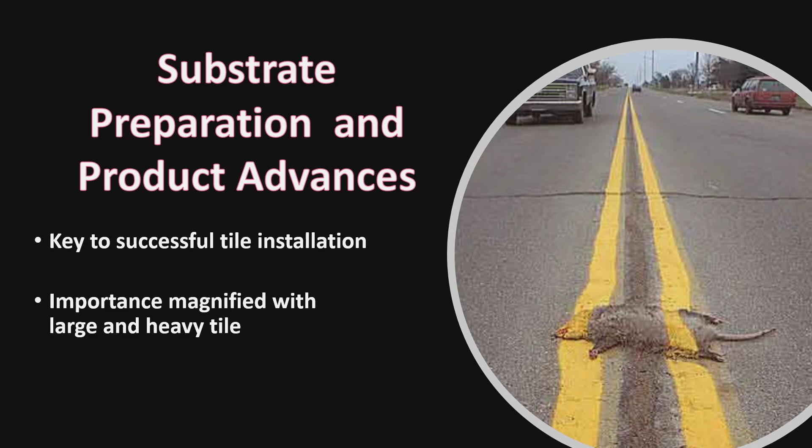To begin with, to me, substrate preparation is key. If the preparation isn't done properly, the rest of the installation is challenged, especially when you're looking at large format tile and tile panels. Contractors will tell you that it's best to address the preparation to begin with to make the installation much smoother and more efficient. Let's look at substrate preparation and some of the challenges that have happened recently over the years.

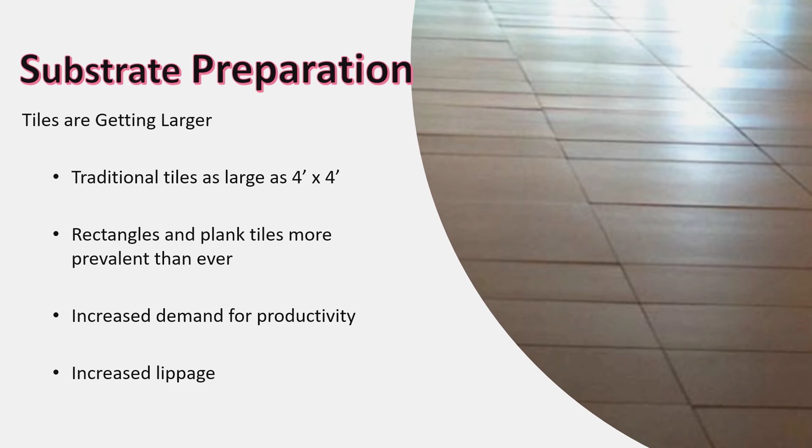Tile continue to get larger and larger. You can have tile that are 4 foot by 4 foot in size. Other trends that are challenging from an installation perspective are plank tile or rectangle tile, and there's also more issues with lippage in those type of installations than in smaller tile. And again, in today's world, there's an increased demand upon productivity and shorter time frames in reference to the actual preparation and installation.

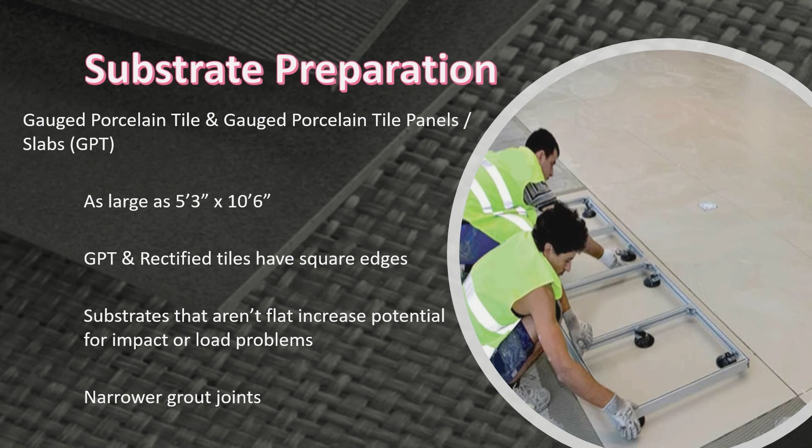The other scenario that turns into a challenge are gauged tile or porcelain tile panels. Some of them are as much as 5 feet 3 inches wide by as much as 10 feet 6 inches long. So the tile panels are a challenging installation scenario.

The other side that makes it difficult is that many of the tile are rectified or they've got square edges. The substrates need to be much flatter when you're looking at a large panel, because you need the coverage behind them to have the support so that you don't have issues with cracking, chipping, or spalling later. And to complicate it, the grout joints are getting narrower.

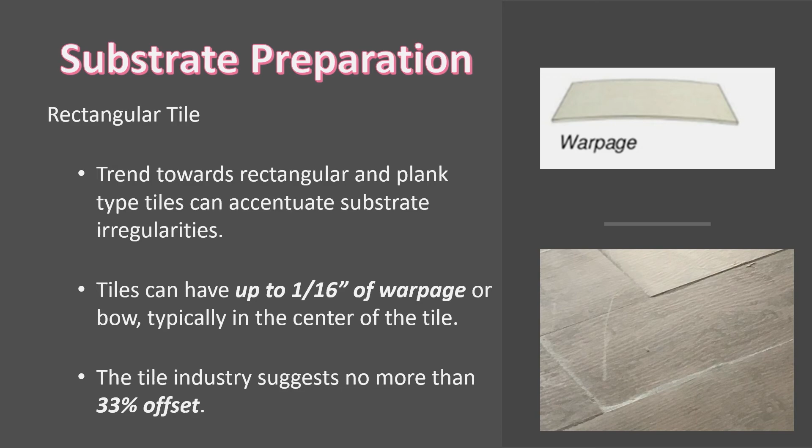One of the challenges with rectangular tile is warpage. Warpage in reference to a tile has a specification and a standard set for it, so we know it exists, but it's an installation challenge on the job site because if you don't do it in an offset pattern, it magnifies the scenario and becomes a challenge later for the installation when it's finished.

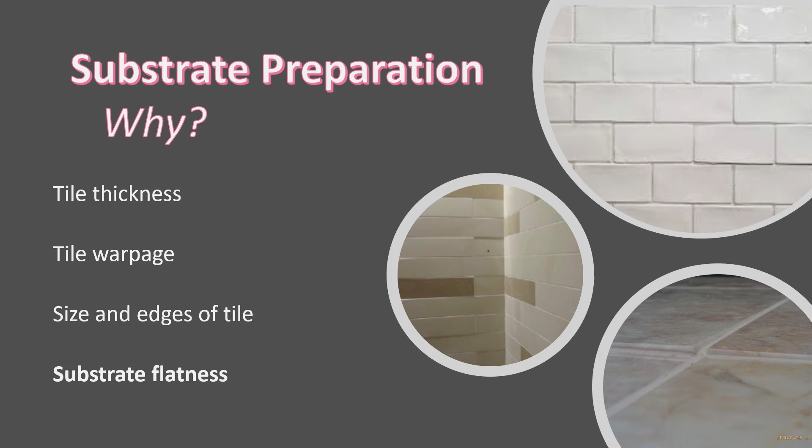What are some of the other problems you have from a tile side? You're looking at various tile thicknesses being a challenge in reference to installing and avoiding lippage. We talked about warpage, and then there's substrate flatness. If you don't have the substrate flat to begin with, later you run into challenges that are magnified when the installation is complete.

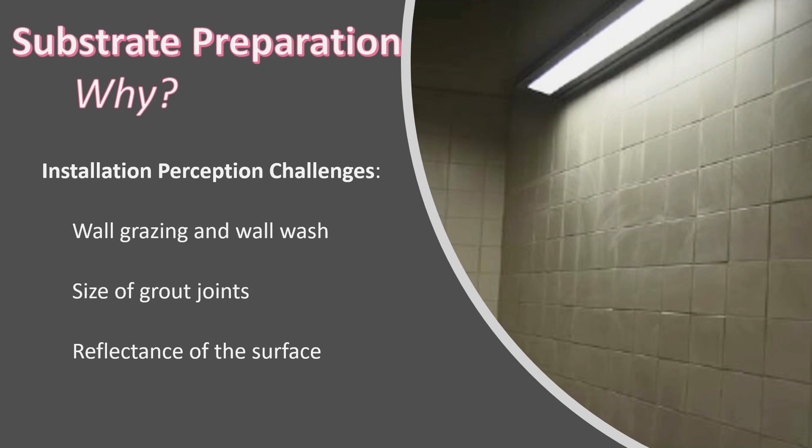One of the common problems noticed later is that many times when you're doing the installation, lighting is very poor, if at all, and it's a scenario that's very popular in bathrooms where you have the lighting shining down on the tile installation afterwards. Thus it causes the appearance you're seeing here, where you've got the wall wash look or the wall grazing challenge. So that's always one to take into consideration and plan for.

The other is the reflectance of the surface, which is going to magnify any problem that you're going to encounter.

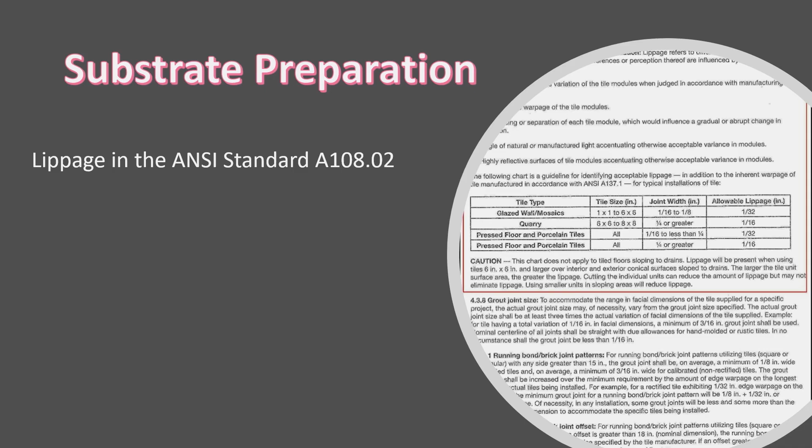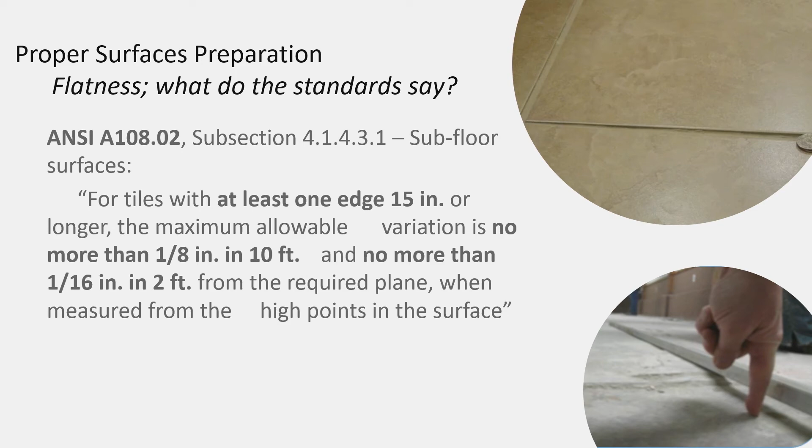The next is the ANSI standard, which also has a standard related to acceptable lippage for tile installation. If we look at the detail in particular in reference to the ANSI standard, it details out that for the tile, they must have one edge at least 15 inches or longer, no more than 1/8 inch in 10 feet. If you're looking at it from a perspective of a 2-foot area, no more than 1/16 of an inch variance.

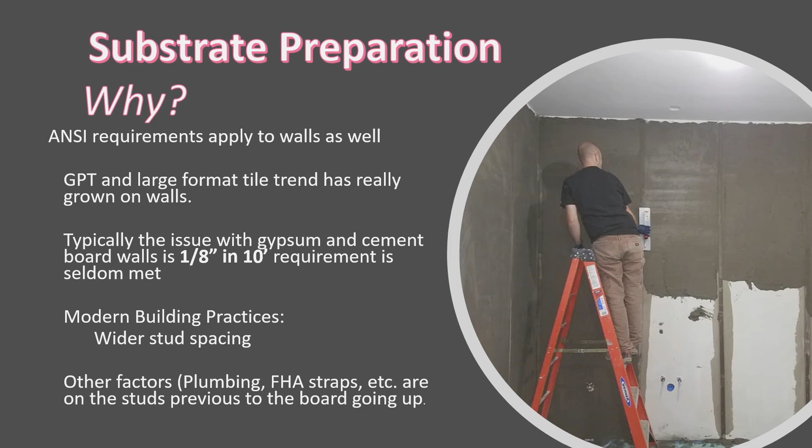Wall applications - ANSI also applies to wall applications, and it's a common problem in the industry related to drywall being out of skew, or cement board. This is a common problem that needs to be addressed with surface preparation, and cannot be addressed with the actual tile setting material itself.

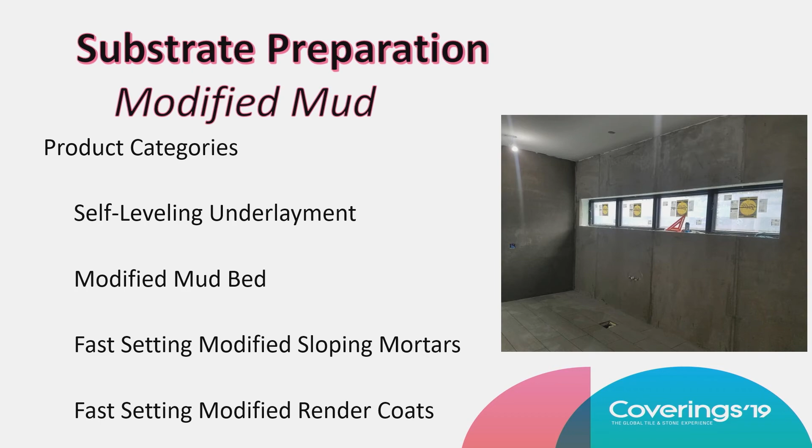Looking quickly at the products designed nowadays to address these issues, we have a category of 4 different types of products: self-leveling underlayments, modified mud beds, fast setting modified sloping mortars, and fast setting render coat type products. This is the technology that has changed over the last 5 or 10 years to address installation problems associated with large format tile, especially gauged porcelain tile panels.

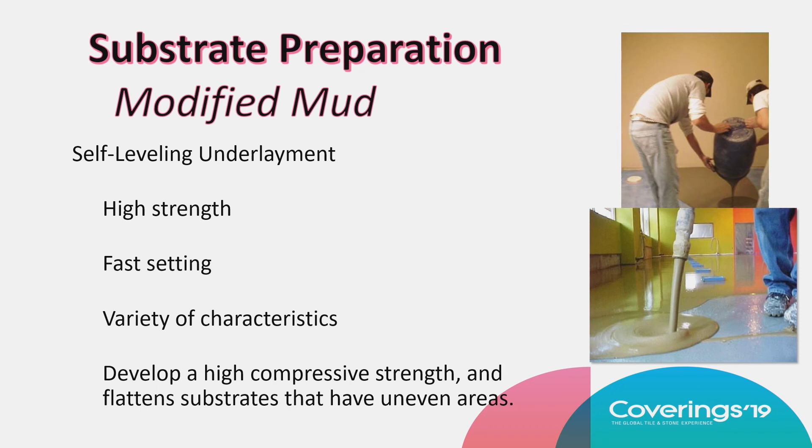Looking at self-leveling underlayments, many of them are high strength, and there's a variety of different types of products - fast setting products, slower setting products, products that range from 1/2 inch up to 3 inches. So the perspective would be to align and select the product associated with the timing of the installation and the demands of the installation you're looking to achieve, as far as flatness in the end surface prep.

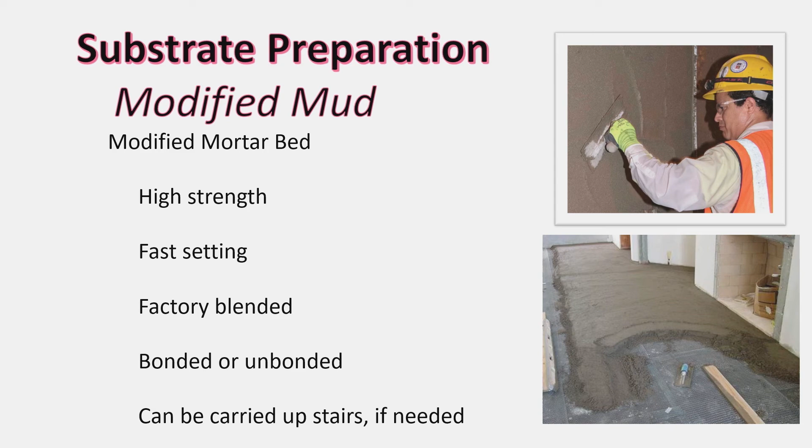There are also modified mud bed products that can be used as a bonded or unbonded installation method. There are fast setting products and slower setting products. But what the manufacturers provide are factory blended versions, as opposed to traditional sand and cement mixed on the job site. These products are manufactured and ready to use, and they come polymer modified or non-modified depending on your selection and need in that particular application.

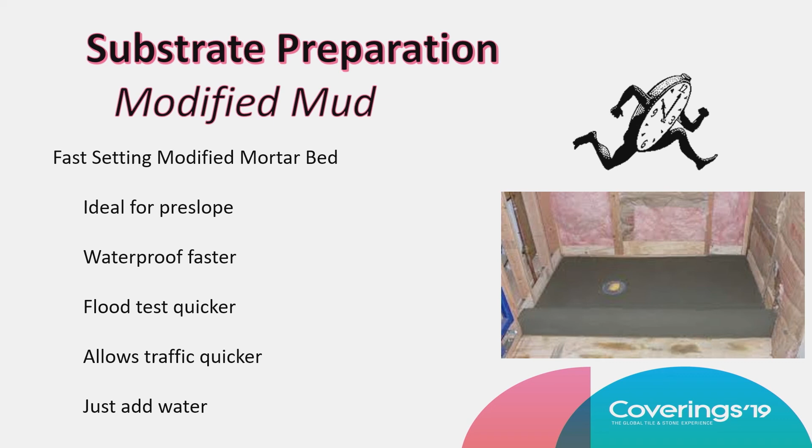There's also fast setting modified sloping mortar beds, which have come into the marketplace in the last couple of years because the push is to reduce the amount of time taken in that installation and turn it over to setting tile and waterproofing quicker. These products can set in as little as 1 or 2 hours, and then can be waterproofed an hour after that. It's really designed for the efficiency and turnaround of the job site, to get to the tile and finish the installation quicker.

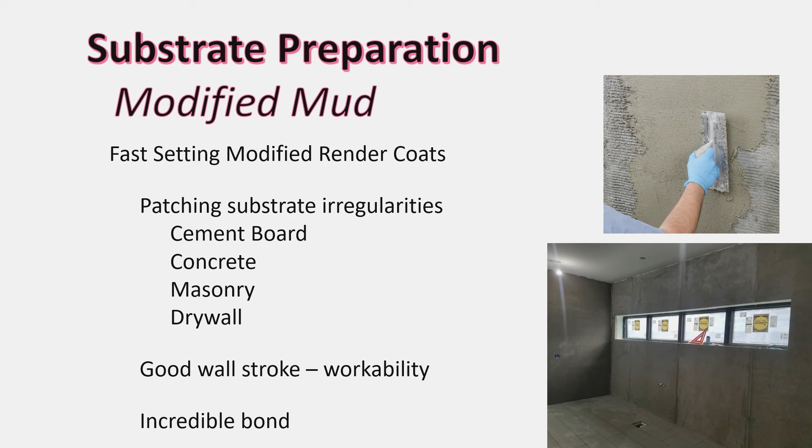There's also fast setting modified render coats that are designed for applications primarily on the wall - like the typical scratch and brown coat type applications where you're looking at truing the wall. In this case they also have fast setting versions as well as slower setting versions.

What I want to move into now is the next section, which is mortars. So we've covered the surface prep. Now we're going to touch on the mortar side of it and look at today's modern mortars and their connection with the installation related to tile.

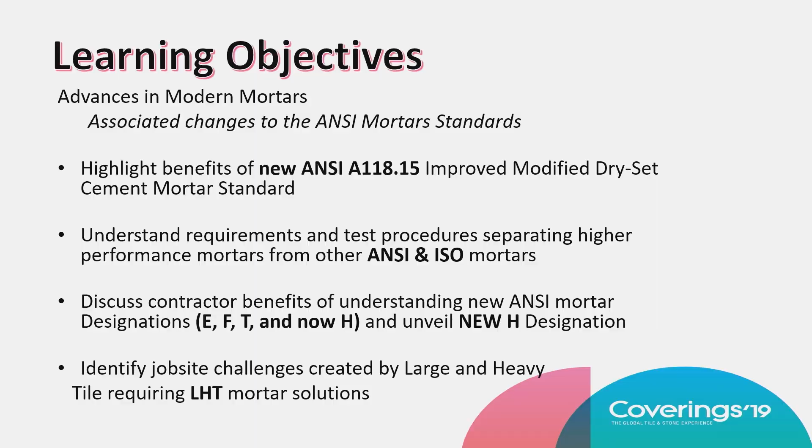I'm going to talk about a new standard that's been introduced, the 118.15, which is a standard for premium mortars, and then we'll talk about the H designation later. But I wanted to touch briefly on the difference between ANSI and ISO and why you should be concerned, and the key points of what you need to know to better understand which product to use for which application. Then we're going to discuss the new standard, the H designation, which is designed for large format tile, and the large and heavy tile challenges on the job site, and why those products were developed to address those individual challenges.

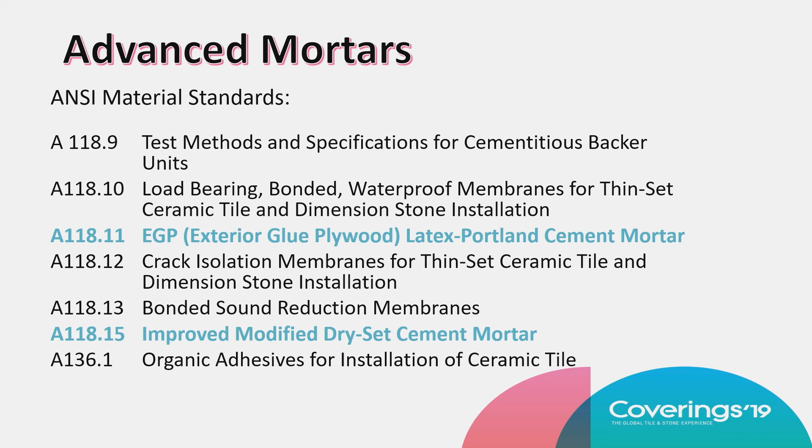To begin with the standards: there's the 118.1, which is the unmodified. There's the 118.4, which is the modified. And then moving into the 118.11, which is if you're going over plywood - that's the only standard that applies to an installation directly bonded to plywood. But we'll spend most of our time on the 118.15, which is the improved mortar standard, the premium products, and we'll discuss the differences and the reasons for that premium category of products.

Previously, the 118.4 was used as a standard for all latex modified mortars. The challenge is that there's a broad spectrum of products that fit within the 118.4. So the specification from the architectural point of view may not be carried through to the installation, because you're looking at specifying a premium product that's a 118.4, but there are lower grade products that meet that specification. So your spec may not be kept because of the category limitations previously. With that, the 118.15 was created to be able to specify and carry through premium products to the actual application.

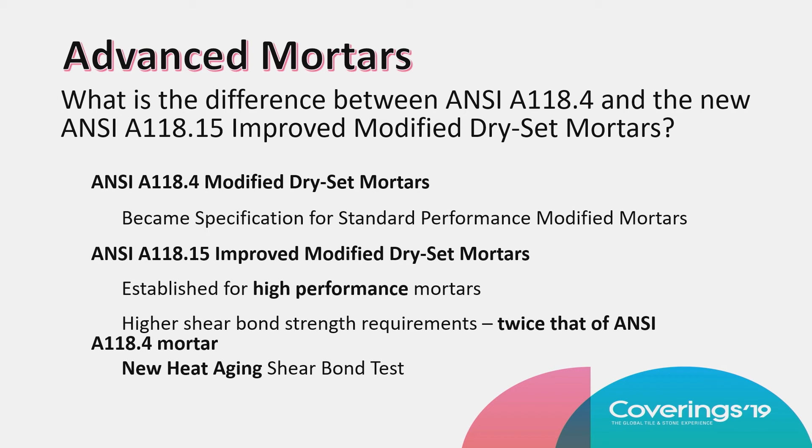What has changed is there's a new high performance standard related to bond strengths, and also a test related to heat aging, which we'll discuss briefly. To understand the standards and the test numbers on a technical data sheet, they're really based upon ANSI testing requirements. All manufacturers are required to follow the ANSI procedure to get those numbers, so you're looking at the actual performance of that product and have a value to rate it on.

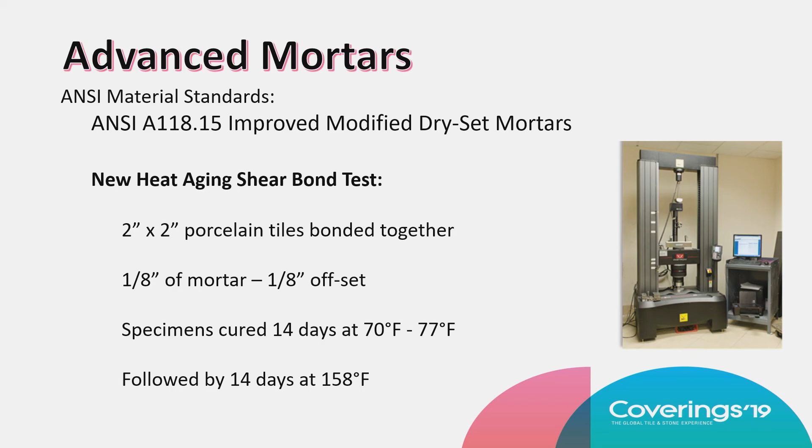If you look at how it's done, you'd take a 2x2 porcelain tile, bond it glaze to glaze in an offset pattern, with an 1/8 inch of mortar between them. This machine is an Instron, which shears the product, and it's connected to a computer so you run a certain number of tests and get a range of performance for that product. That's the numbers you're looking at, whether specifying it or meeting a spec of performance—it's done according to ANSI testing.

What's different with the new standard is that it has a heat aging test associated with it, so it has additional test requirements compared to the original 118.4. It also has a higher shear strength, where with porcelain it requires over 450 psi—one of the standards is actually doubled from where it was with the 118.4.

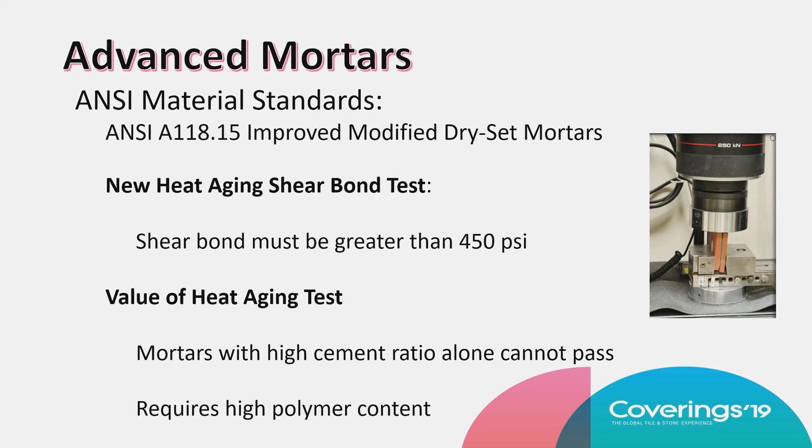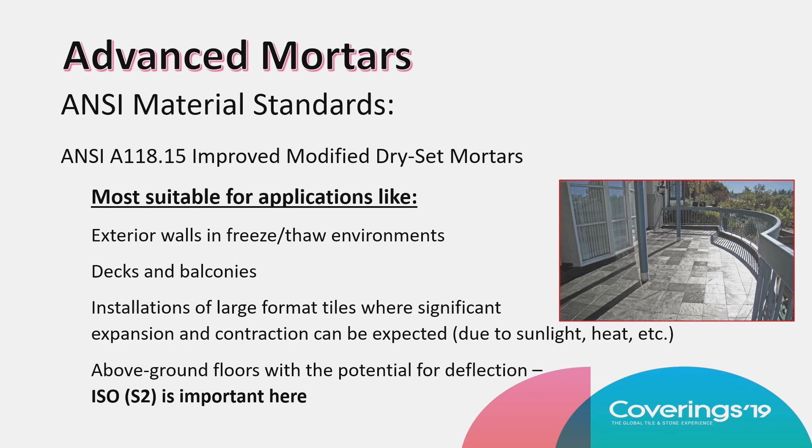So it ties into where would I use a product like this, or where would I need a premium product? Premium products are really called for in exterior applications, whether vertical or balconies, situations where you have rain, snow, and freeze-thaw. You may wake up in the morning in a mountain environment and it's 40 degrees; in the afternoon it's 80 degrees and the sun is shining on a dark tile, and it's actually more like 120. So you're looking at a lot of expansion and contraction, and that's the environment the premium products were designed and developed to address.

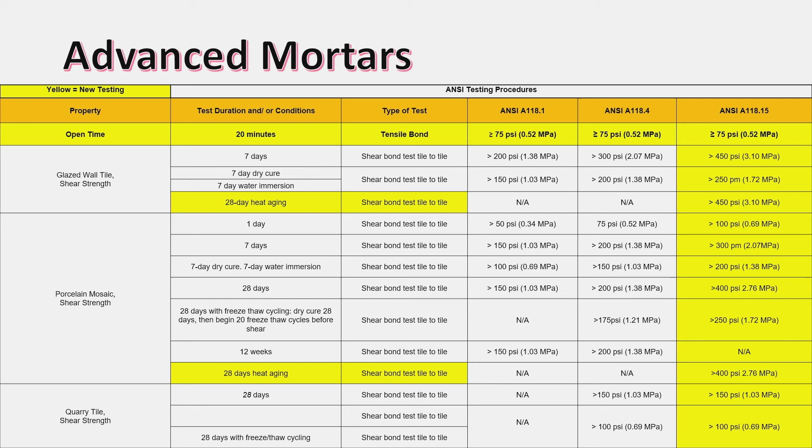This is a quick look—what you'll see in yellow are the new specs created and associated with the 118.15. It looks at the new higher shear numbers required from that product, and it also details the heat age testing, which was not there in previous test performance.

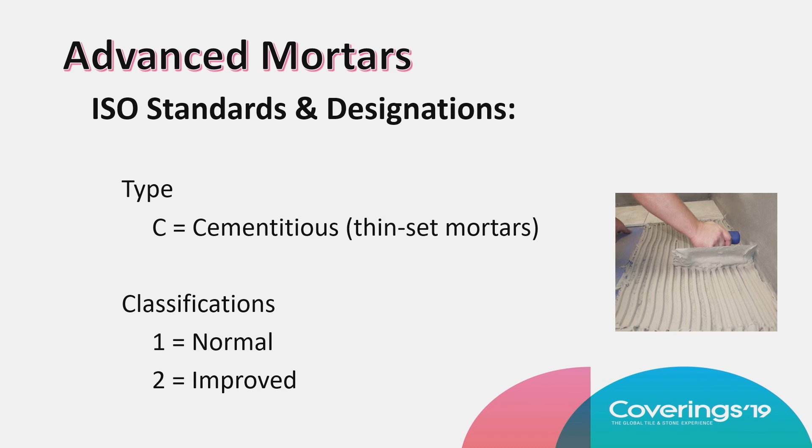Then there's also the ISO standard. The ISO standard to me is unique because it does some things that aren't possible in ANSI testing. ANSI testing, as we talked about, is shear. ISO tests for deformability—it's actually a tensile pull, so the test is more repeatable. The numbers are much truer from a global perspective, so everybody can test products worldwide under the same qualifications.

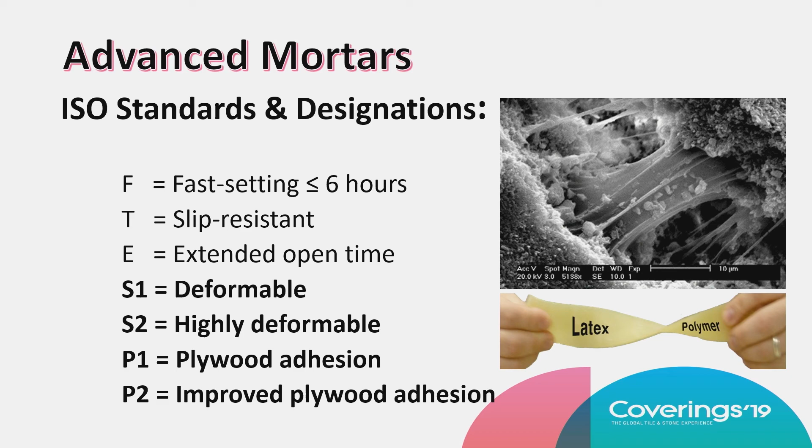But the one thing it does that ANSI doesn't is deformability. Imagine a mall area with a second-story cement installation and continual walking on it—you can feel the bounce when you're walking. That's deformability, and that's what ISO tests for that ANSI does not. ANSI is a pure shear, which would be expansion and contraction. But for an ideal installation, I'd look at both ISO and ANSI testing, so you can account for every type of movement the installation will be subjected to.

The other thing you'd look at with mortars is the E, which is extended open time—the working time the contractor has after troweling the product to set the tile and get transfer to the back of the tile. This is important on a job site because in the lab everything is tested at 70 degrees, 50% relative humidity, a beautiful world that never happens in the field. He may have an environment with a lot of air circulation, windows not in yet, dry air coming through, so he may not get that 20 minutes. The premium products with longer working time give the contractor an advantage in getting the coverage he needs to support the tile, so he doesn't have issues with bonding, cracking, or other related problems.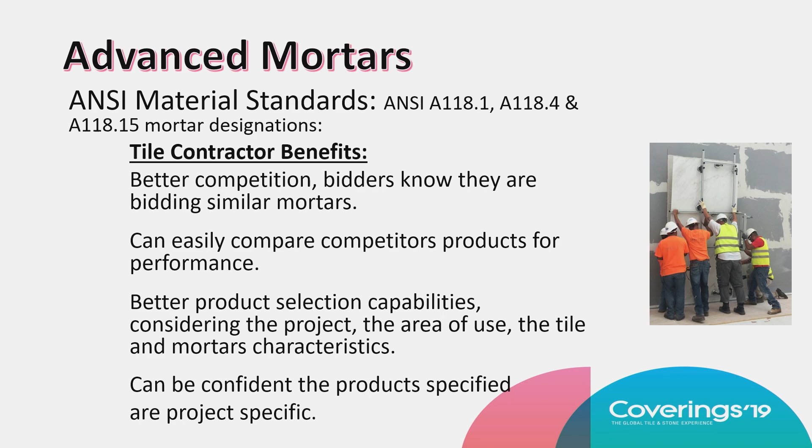We'll talk about the H, which is the new standard for large and heavy tile. But basically, from a tile contractor's perspective, the advantage of the premium mortar is it gives competitive bidders the same scenario where they're all bidding premium quality products. Before, with the 118.4 and its wide range of products, you could have a contractor bidding on the low end and one on the high end. With this standard, you know you've got a premium performing product and everyone's bidding similarly.

It also gives you better use of tile and mortar characteristics, and you're more confident that what has been specified is actually being used on the job site.

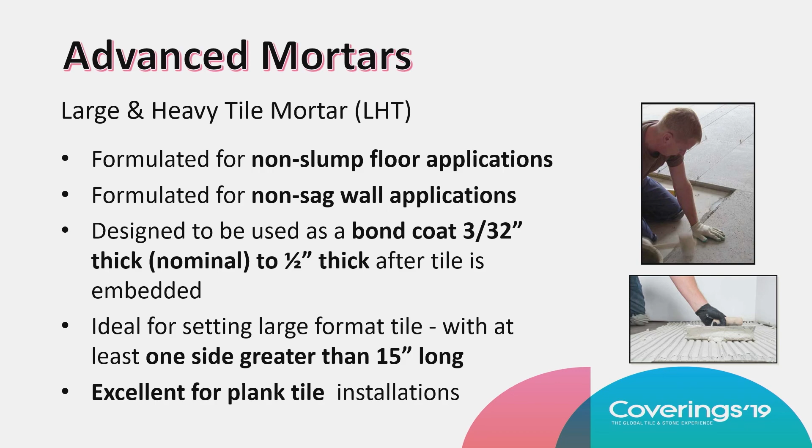Let's look at large and heavy tile mortar. The advantages: they're non-slump, non-sag, and have the ability to build from 3/32 up to a ½ inch in thickness. None of these products are designed to level your floor. There was confusion years ago where they were called medium beds, and the assumption was you could level the floor or set a floor with a medium bed. As we talked earlier, leveling needs to be a separate surface prep application, not done by the mortar, because although these mortars have the ability to be set at a thicker thickness, they're not designed to level the floor.

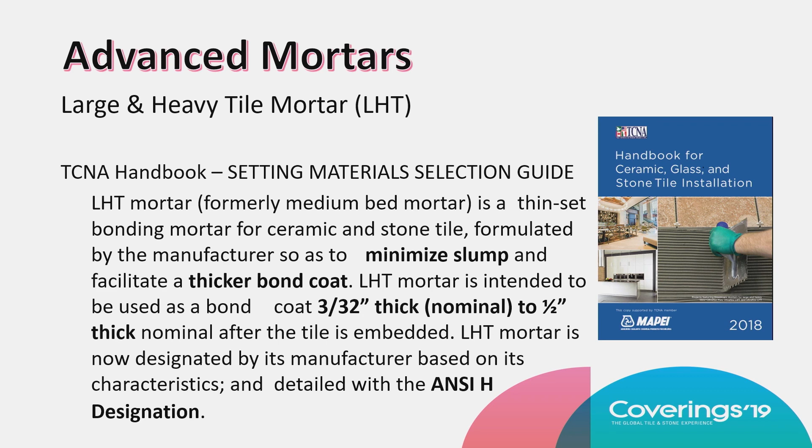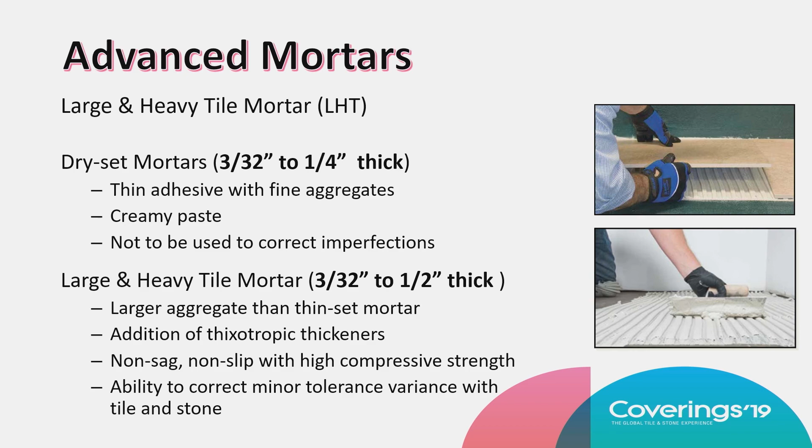Looking at the TCNA handbook, how large and heavy tile is defined, the key points are it minimizes slump, it can be used as a thicker bond coat, and it has an ANSI H designation. The difference between a regular dry-set and a large and heavy tile mortar is defined by the embedded thickness approved for that mortar. To get a ½ inch embedded thickness, you'd use a 1 inch square notch trowel, because when compressed, that gives you a ½ inch of embedded thickness. The products are capable of building higher than that ½ inch in a troweled application, but from the specification, this is the detail related to that.

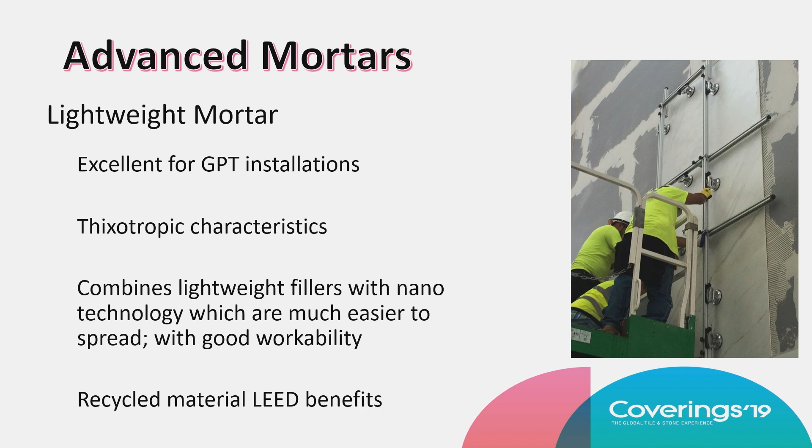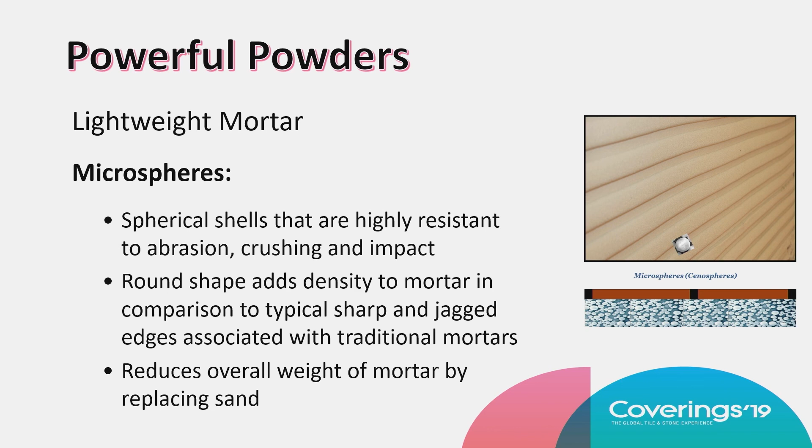Also, there are lightweight mortars out there nowadays that are both fast setting and regular setting. They combine nanotechnology and have some recycled properties. They do not contain added silica because they use a glass bead type filler, with glass spherical additives instead of silica sand. This also reduces the weight of the product—many of them are half the weight for the same volume of coverage, so a 25-pound bag will cover what a 50-pound bag does because of that technology. They also use very fine particles, which makes them contractor friendly because they're easier to trowel and work.

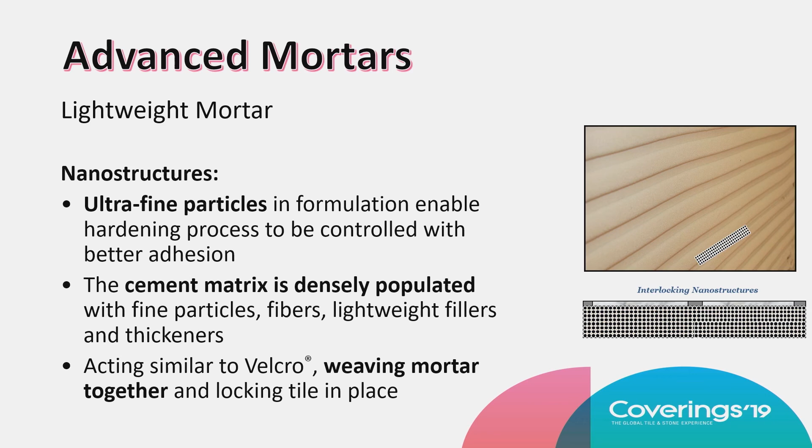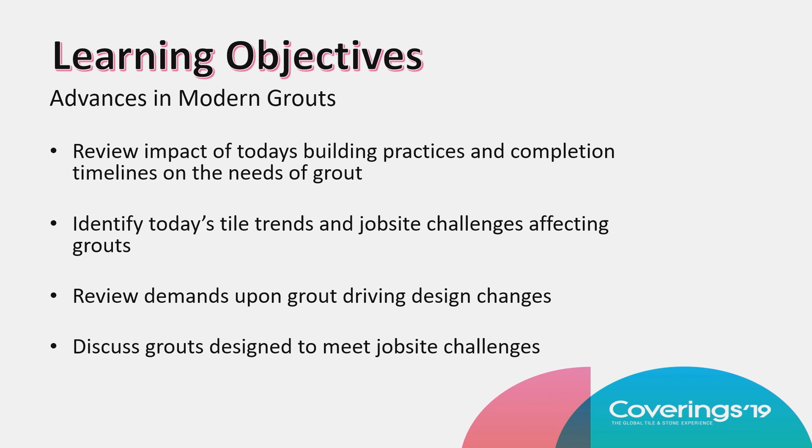Let's look at grouts as our final segment and talk about the advances in the grout business that align with today's building practices, and how they affect the grouts and the technology behind them. We'll look at job site challenges and their impact upon grouts, how grout is driving design changes, and discuss the properties of different grouts and how they meet the needs of the installation community.

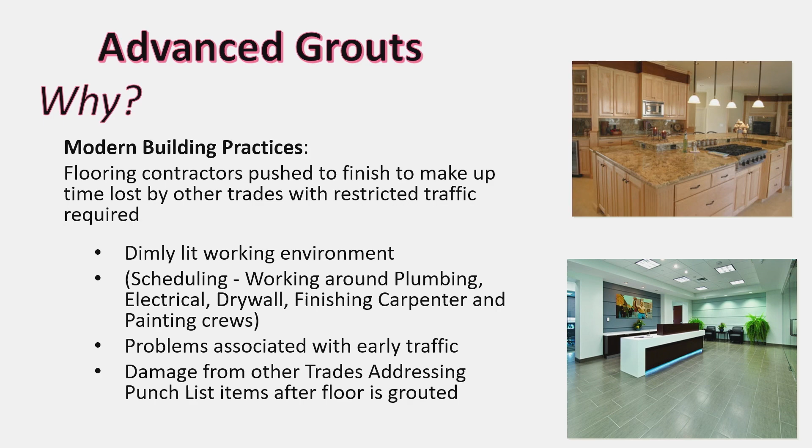Let's look at modern building practices as it relates to grout. Flooring contractors are always pushed to finish the job. Usually by the time the flooring contractor gets there, the job's already a week behind, and they're looking for the contractor to make up the time, which becomes quite a challenge. You're often having to work around plumbers, carpenters, or drywallers, and finishing up after the contractors before you, dealing with their punch list and wanting traffic or access to areas you need to keep traffic off of for the period of time needed for the mortar to set and the grout to not have problems.

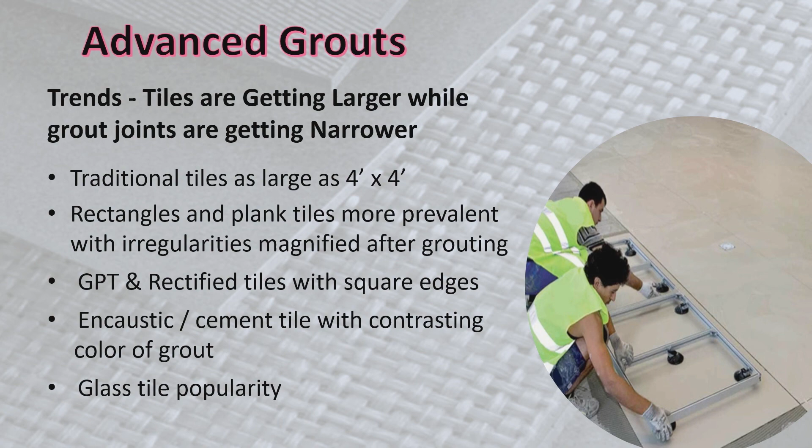So what are these trends in tile that also affect the grout? The same trends that affect surface prep products and mortars really affect the grout as well, changing the technology we've addressed over the years. It's not unusual now to have a 4x4 tile, rectangular and plank tiles, rectified tile, and cement tile is also very much a popular trend. These are challenges that affect not only the mortar, but the grout, the curing, and the application processes associated with it. And glass is completely popular nowadays, but it has its limitations in reference to installation products and concerns about grouting—making sure there are no scratches or anything that would be a blemish noticed later.

So let's look at the demands of the grout. The same thing applies—you're looking for increased productivity when the contractor is on the job site, but also from an aesthetic perspective, the homeowner, or even commercial clients, are much more interested in stain and chemical resistance with today's grouts than they were in the past. Lippage is also a problem with grout—many times it's not noticed until you grout, because grouting actually magnifies the appearance of the lippage.

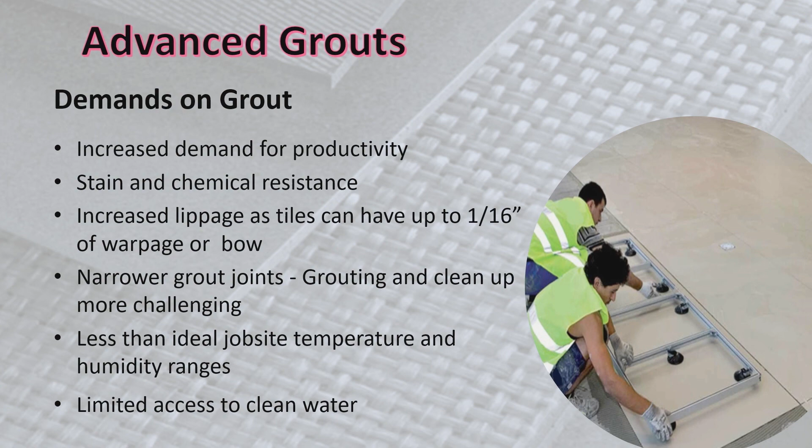Prior to grouting, you may have thought everything looks good because you're not seeing the lippage at that point, because the grout makes it obvious.

So you're looking at challenges as far as grout cleanup. Anytime you're looking for productivity and pushing crews, and they're looking to get it done quicker, all of that is working against the grout products.

Or the standard Portland cement type of grouts that were used in the past. Typically the job site conditions are less than ideal in reference to the temperature and the other elements, or the lighting. And you've always got the fact that many job sites have limited access to clean water. What that means is if the contractor doesn't have the ability to frequently change his wash water, he's going to run into challenges in the cleanup phase that would not have been encountered if he were able to clean his water and not try to stretch the water related to the issue.

Let's touch on some of the grouts that are out there. The new technology is the single component. It comes in a variety of different versions - there's acrylic, there's urethane, and then there's hybrid type technologies that are out there from the different manufacturers.

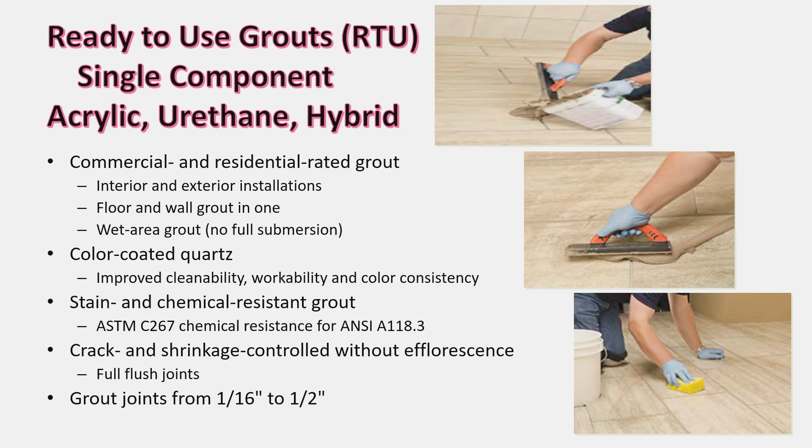They can be commercial, they can be residential in application, interior, exterior, wet areas to a certain degree. You'll want to check with your manufacturer in reference to the limitations they may have on wet areas with products like that. But you're looking at things like color-coated quartz that give a better color, a more consistent color, a little better workability properties. They also have chemical and stain resistance to a degree.

There's not a current standard for these products, and that's where the industry always, as trends change and things change within the industry, the standards usually follow. So the committees work on developing standards, but the products are always developed to address the needs prior to the standards being implemented in the industry.

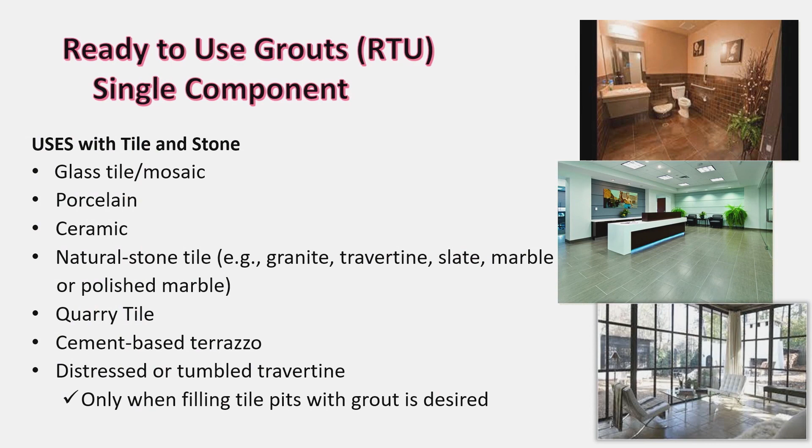They've got some crack and shrinkage control, and also they're not prone to efflorescence. They'll have joints from 1/16 inch to a 1/2 inch, so they're looking at products that are both wall and floor in nature. From a tile installation perspective, they cover the gamut of the type of tile that are capable of being installed.

And then you have products that don't have any seal requirements. They have a good grout appearance.

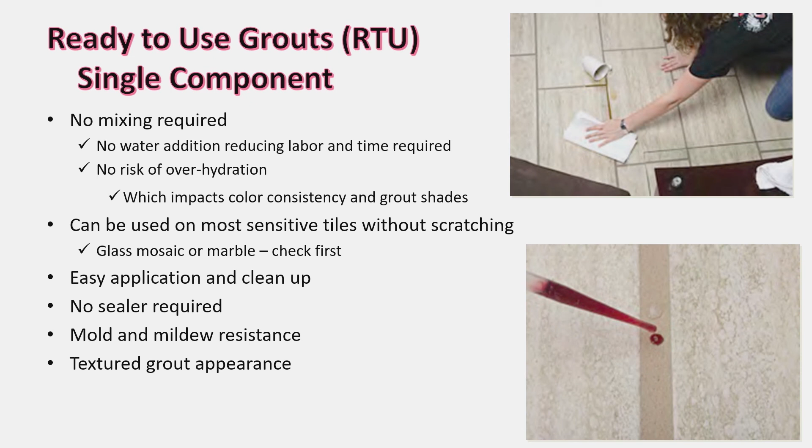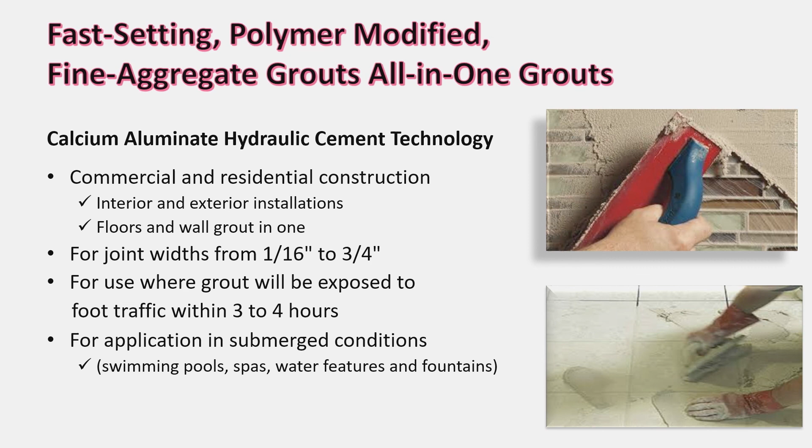Touch on calcium aluminate cement, the fast setting type of cement technologies. They go from 1/16 to 3/4 inch. They're good for submerged applications. They don't have efflorescence because of the type of technology you're using and the fast set perspective. They cover the gamut of tile as well.

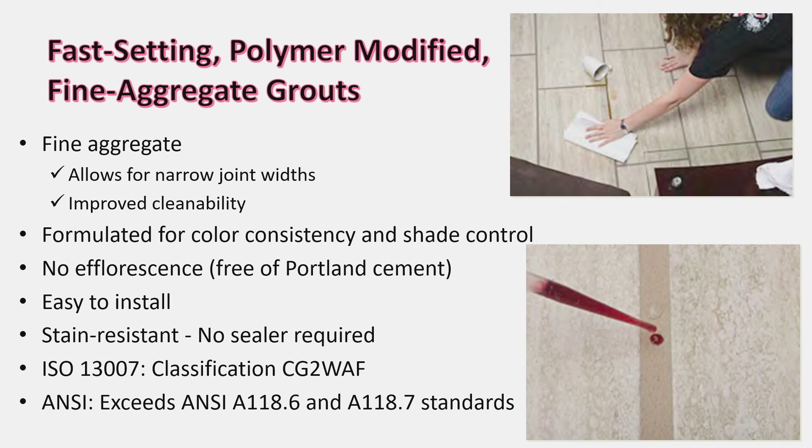Then you're looking at the fine aggregate products that give you the better appearance and some workability property enhancements.

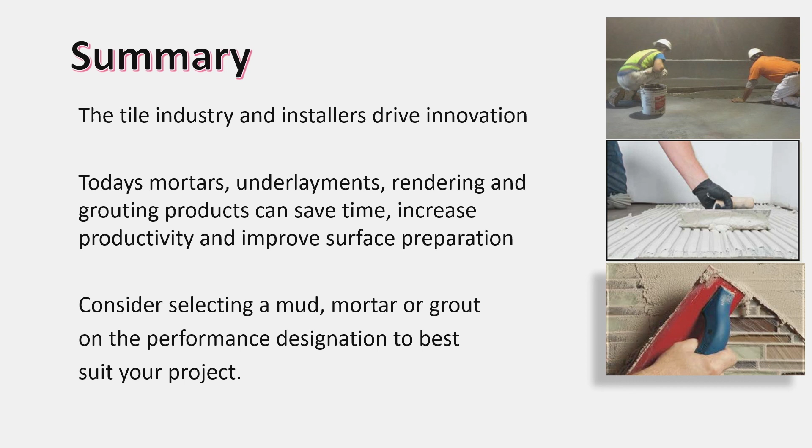So in summary, I would say that the tile installers and the industry is driven by innovation that relates to the substrates as well as the changes in tile. The manufacturers of the mortars, underlayments, rendering products, and grouts are reacting to the demands of the industry from the change of the substrate, from the change of the tile, and from the needs of the contractor to pull that together to develop the products to match with the systems that are being installed.

So from what we've seen quickly today, the consideration is whether it's a surface prep, whether it's a mortar, or whether it's a grout. Those are the considerations to take into effect when you're making your selection as to which product you would like to use. So that concludes the presentation. I'll take any questions if anyone's got any.

Is there ever a scenario where the grout helps mitigate the lippage, with less of a slip or less of a visual? No, unfortunately the grout is not able to cover the lippage itself. It just makes it more obvious, because when the grout space is open, you can't see the height variance. But once it's grouted, it becomes extremely noticeable because the grout a lot of times is not flush in that area, and it's not able to be tooled properly.

Is the standard no lippage? Is there a tolerance for lippage? There is a tolerance for lippage. Briefly, we had shown a spec for ANSI and also for the TCNA. In the handbook of the TCNA and the ANSI spec, they have a detail as to how much lippage is acceptable on the installation. And it's going to vary depending upon the type of tile you use, the width of the grout joint, and that all takes into effect what is acceptable.